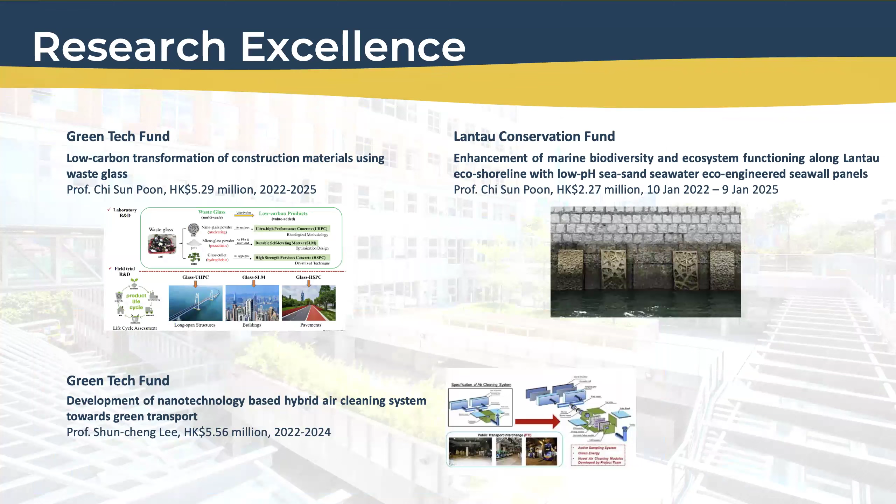and environmental engineering. Dr. Liu's research focuses on explorations of novel microorganisms and applying these newly discovered microbial reactions in tangible applications. These applications manifest notably in the treatment of wastewater and waste sludge, as well as the upgrading of biogas and syngas, thus ultimately contributing to the advancement of sustainable environmental practice.

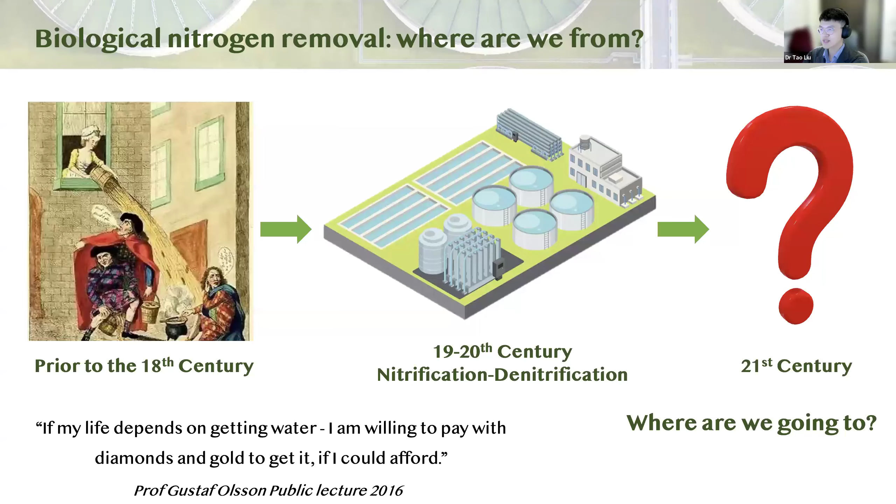If we look at the most significant changes happening in our daily life in recent years, you will find most of these changes are really based on some very significant fundamental findings. For example, the self-driving cars or the wireless charging technologies. These new technologies are really developed based on new fundamental findings in the relevant research field. So the same case for our wastewater treatment.

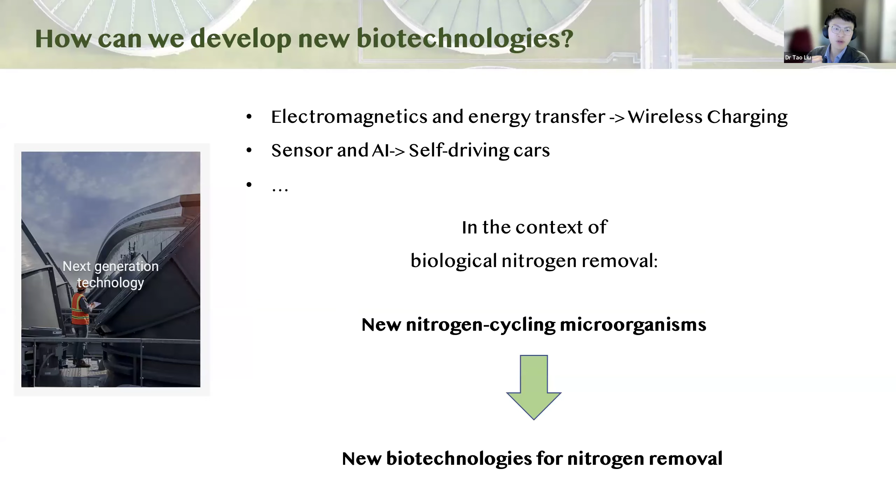For wastewater treatment, as I think most of you know, we rely on microbial processes, on biological processes, for removing the contaminants from wastewater. That's why the fundamental discovery of new microbial or biological processes is really becoming the foundation for the development of new biotechnologies for wastewater treatment. So this is really the logic between new technology development and the new fundamental knowledge we obtained from our research.

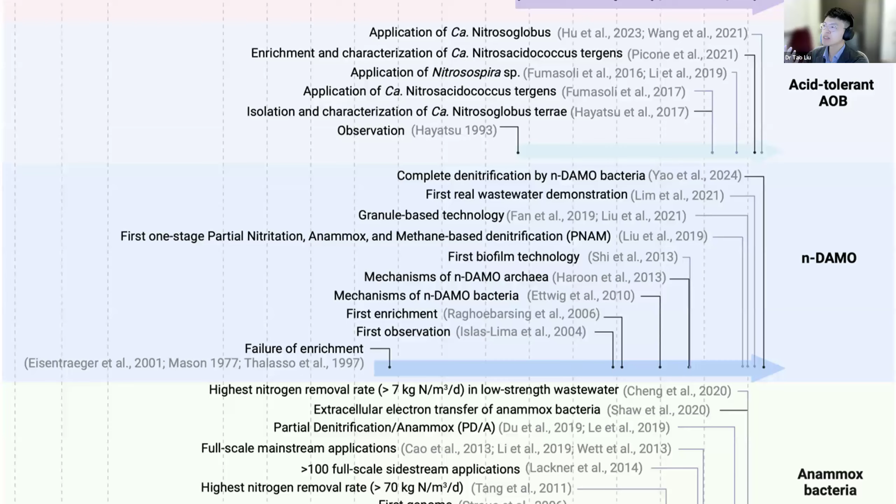In one of our recent publications, we summarized all the significant fundamental findings in the past 50 years and all the significant technologies we developed in wastewater treatment in the past 50 years. This is a very big figure, but you can see from part of this figure the fundamental discoveries, which are labeled as the black line, and so let me put my laser pointer.

As you can see from this figure, the fundamental findings and the technology development are labeled using different colors, but one very general conclusion from this figure is that the development of new technologies and the discovery of new fundamental knowledge are always connected with each other. Basically speaking, fundamental discovery supports the development of new technology, and in turn, the development of new technology also supports the discovery of more new fundamental findings. So that's really the beginning of my presentation.

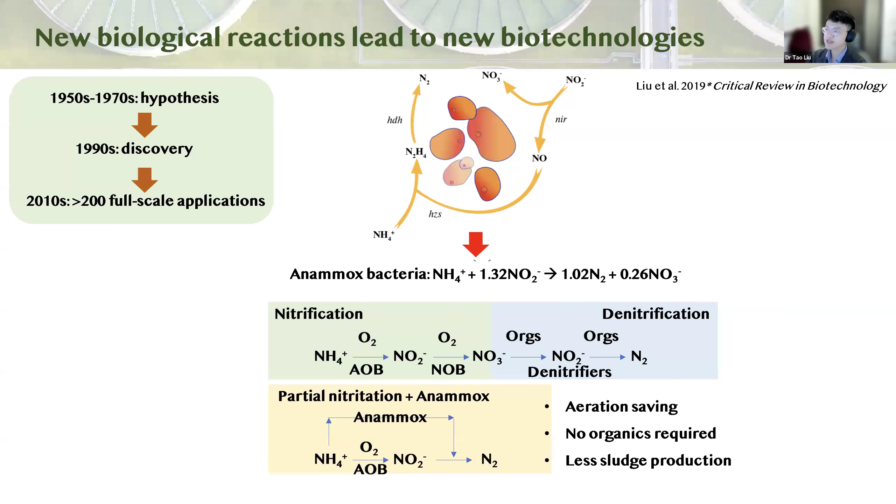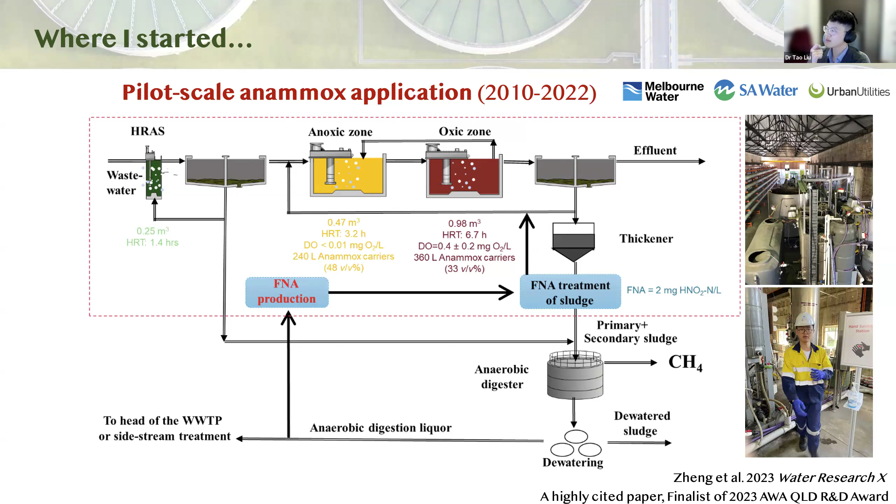Because of this experience working in the water industry, I have learned a lot about water and wastewater engineering, and I really had the opportunity to learn what the real requirements and real needs of the wastewater industry are. One of the facts I want to share with you is that the Anammox process nowadays has been applied in more than 200 wastewater treatment plants already, more than 200 full-scale applications.

But the fact is, all these full-scale anammox applications are utilized to remove nitrogen from side-stream wastewater. So what is side-stream wastewater? Side-stream wastewater means some very special wastewater, such as industrial wastewater, anaerobic digestion liquor, or landfill leachate. A unique feature of side-stream wastewater is that it usually has a very high concentration of nitrogen pollutants.

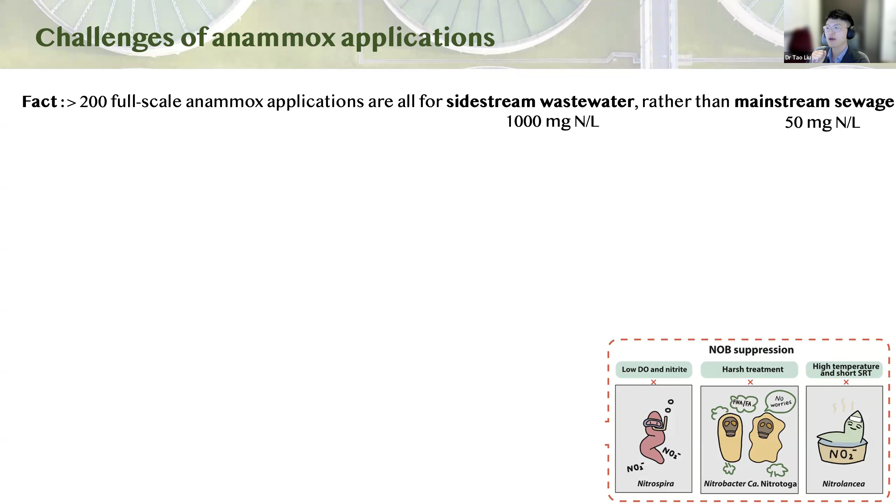However, for the most common domestic wastewater, the sewage, the current application of anammox is very, very limited. I have to say, at the current stage, across the world, there may be only a few successful full-scale anammox applications for treating domestic sewage. So why can't anammox technology be applied for domestic sewage treatment? There are mainly two major challenges.

The first challenge is NOB suppression. So what is NOB suppression? Again, come back to these figures. In order to utilize partial nitritation anammox, we need to suppress the second step of nitrification, which is the conversion of nitrite to nitrate. We need to stop this process using some strategies. We need to kill or inhibit this bacteria.

However, suppressing NOB, the bacteria contributing to this second step, is extremely challenging in mainstream sewage. Two of my students, Yan, my first PhD student, and Sue, the first PhD student I co-supervised, used laboratory study and mathematical modeling to prove why NOB suppression in the mainstream condition is extremely difficult compared to side-stream wastewater. I will not go into too much detail, but the conclusion is NOB suppression is very difficult in mainstream sewage. That's one of the challenges for applying anammox in mainstream sewage treatment.

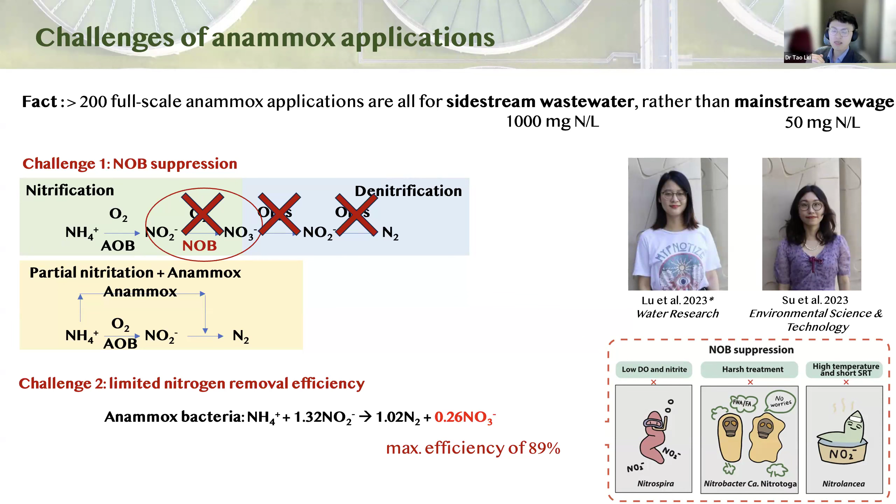That's why our research group wants to develop strategies to overcome these two challenges and make anammox applicable to domestic wastewater treatment. To overcome the first challenge, we got some inspiration from the side-stream application. Remember, anammox has already been applied widely for side-stream wastewater, with more than 200 full-scale applications. Why can anammox be applied there? One very important fact is that side-stream wastewater has a very high concentration of nitrogen.

Because of the high nitrogen concentration, even at pH 6.5, a relatively neutral pH, it will naturally form a chemical named free nitrous acid, shortened as FNA. FNA concentration can automatically reach the 1 to 3 ppm level in side-stream high-strength wastewater. There is an equation to calculate the FNA concentration, shown above; it is related to the pH and the nitrite concentration. Because of the high nitrite concentration, FNA can easily reach 1 to 3 ppm. And FNA is actually a toxic chemical.

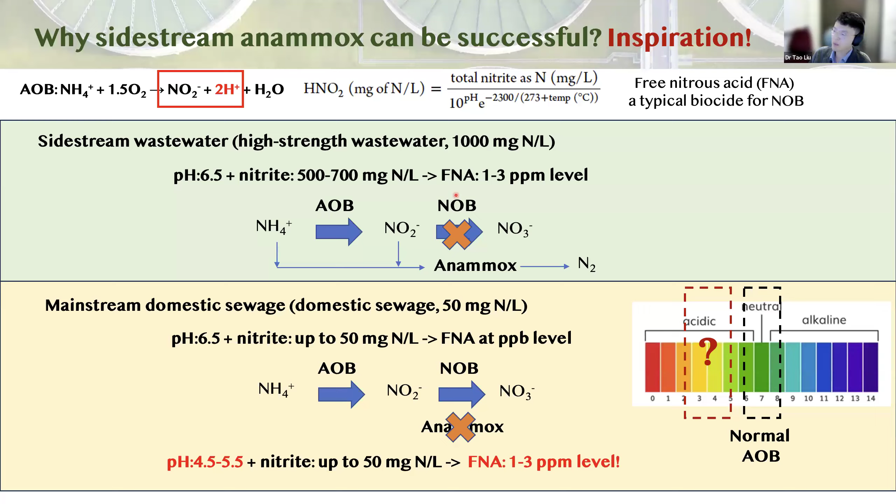So therefore, we wonder, can we find some new microbial process or biological process which can tolerate, which can survive at acidic pH? For example, pH 4.5 or pH 5.5. That's really the inspiration or the starting point for our research. So we want to find some acid-tolerant bacteria which can survive at acidic pH in order to achieve the goal I just mentioned.

So therefore, we looked into the literature and found that the acid-tolerant AOB, the acid-tolerant bacteria, exist in many natural ecosystems. Many different publications have already found acid-tolerant bacteria in acidic soil systems. And therefore, based on these discoveries from natural ecosystems, the research group led by my previous supervisor, Professor Zhiguo Yuan at UQ, tried to enrich such acid-tolerant bacteria in our laboratory bioreactors. The fact is we were successful. We successfully enriched the acid-tolerant bacteria in our laboratory reactor.

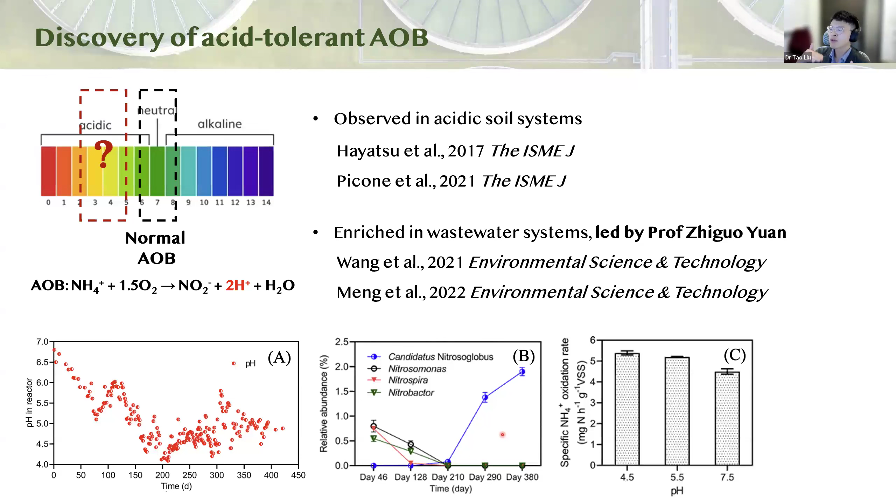As you can see here, the pH of the bioreactor gradually decreased from around 7, the neutral pH, to pH 4.5 or 5.5, this acidic pH level. And during this process, we found the traditional bacteria currently utilized in wastewater treatment plants disappeared. For example, Nitrosomonas, Nitrospira, and Nitrobacter disappeared after 200 days. And gradually, a new bacterium named Nitrosoglobus appeared in our bioreactors and became the dominant bacteria in the reactor. So at this acidic pH, the new bacteria were enriched in our laboratory reactors.

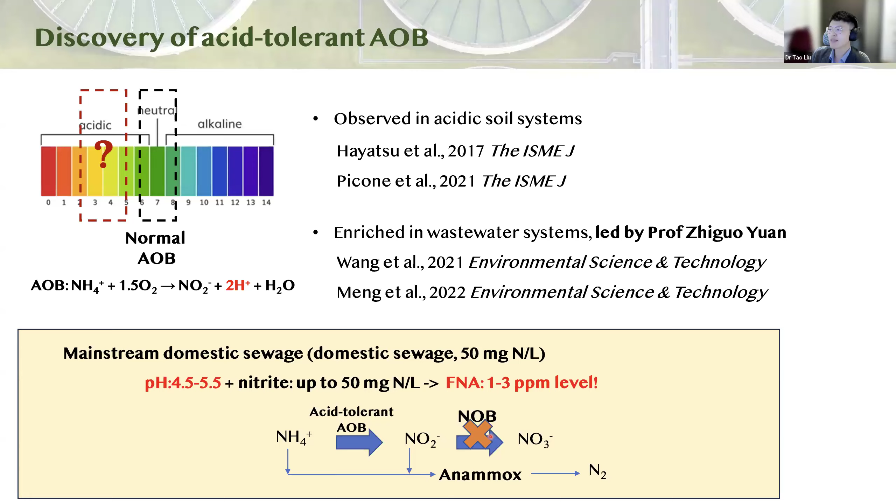So by utilizing this newly enriched acid-tolerant bacteria, our previous hypothesis became true. We can utilize this bacteria to operate the bioreactor at pH 4.5 to 5.5. If that's the case, even with mainstream domestic sewage, we can achieve ppm-level FNA, and because of this high FNA, we can suppress NOB, and then we can apply anammox technologies. So that's really the reasons and the hypothesis behind our research story.

And the second PhD student, Niu, his PhD focused on the development of technologies utilizing this acid-tolerant AOB in wastewater treatment. So in his research, we developed a membrane biofilm system to cultivate this acid-tolerant AOB in our laboratory.

But one very interesting phenomenon I want to highlight here is the nitrogen removal rate we achieved in this study is one order of magnitude higher than the rate currently utilized in wastewater treatment plants. For example, in current wastewater treatment plants, the nitrogen removal rate is usually about 0.2, 0.3 kilogram nitrogen per cubic meter per day. And in this research, the total nitrogen removal rate we achieved is around 2.3 kilogram nitrogen per cubic meter per day.

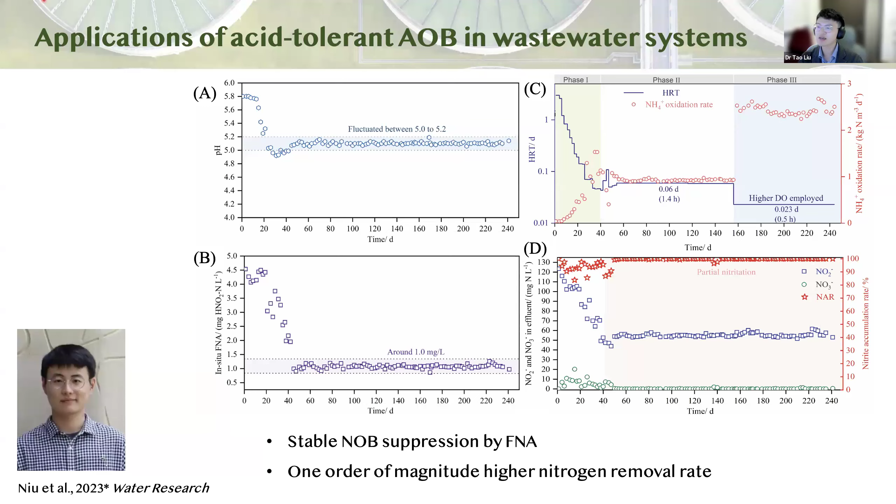So that's really one of the very significant findings from this research. Again, similar to the phenomenon I just showed you, the traditional bacteria disappeared along this process, while the new acid-tolerant bacteria, Nitrosoglobus, gradually enriched in our bioreactor, which has been confirmed using different methodologies.

So that's our application of this new bacteria in wastewater treatment. Actually, in addition to wastewater treatment, we also apply these bacteria for sludge treatment, because for the wastewater, we generate a lot of sludge, the primary sludge and the secondary sludge.

So one of the very traditional approaches to manage the sludge is to add some acid to regulate the sludge pH. For example, if we add some acid to acidify the sludge to pH 4 to pH 5, we can achieve the sludge reduction and stabilization purpose. And if we further decrease the sludge to pH 2, we can remove some heavy metals from the sludge. And in order to landfill this sludge, eventually we also need to add some base to raise up the pH again. So this is really a traditional way to manage the sludge in current treatment plants.

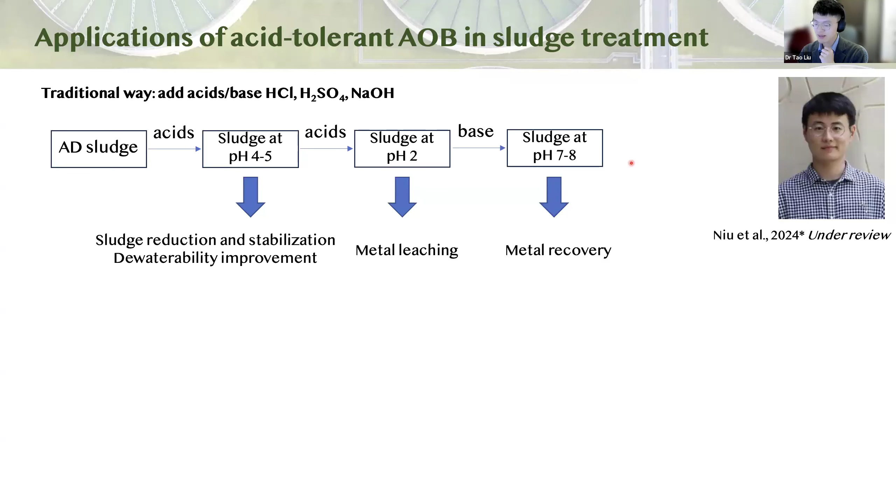So if we can utilize the protons generated in the nitrification and the alkalinity generated from the denitrification, we can easily regulate the sludge pH from neutral pH to acidic pH and then back to neutral pH again. So this is the principle or the hypothesis for our technologies. That's why we proposed some technology to achieve this goal.

For the sludge, we mix the sludge, for example, the primary sludge or the secondary sludge or even the AD sludge, together with the acid-tolerant bacteria we enriched in the lab. We mix these two cultures together and we put in some aeration. Because of the protons generated in this first equation, the sludge pH will gradually drop to 4 to 5. If we only target sludge reduction and sludge stabilization, pH 4 to 5 is already enough.

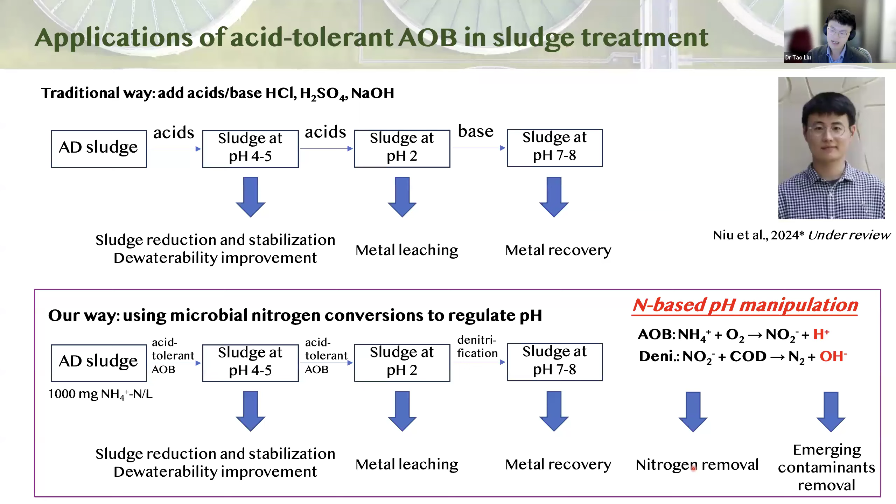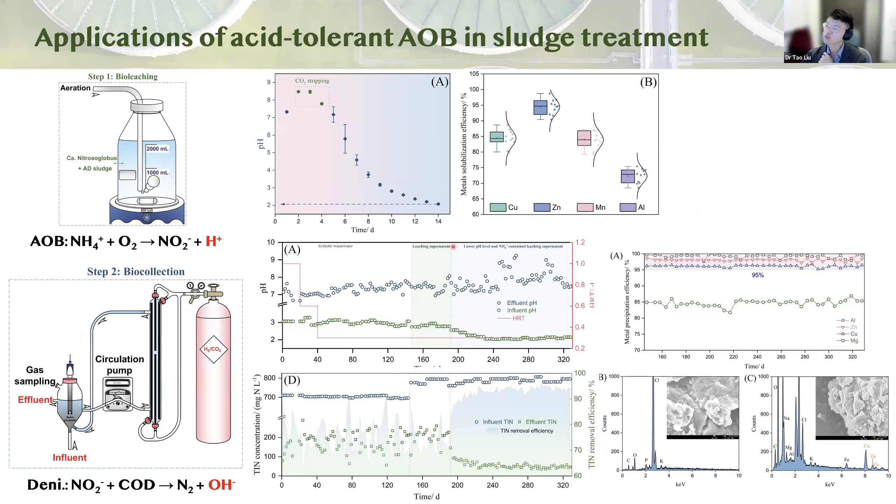Okay, one more thing I want to highlight here is because we can drive the pH back to neutral, we can also recover the heavy metals from the sludge. You can imagine the heavy metals will be first removed from the sludge because of the low pH. They will be leached from the sludge into the supernatant, and then once the pH is raised to 7, these heavy metals will precipitate. So we can recover these heavy metals again from the supernatant. So that's what we achieved in our laboratory.

Now let's do a very quick summary of the first stage, our applications. By utilizing these acid-tolerant bacteria, we can achieve both more sustainable wastewater treatment and more sustainable sludge management. We can utilize the acid-tolerant AOB and anammox for wastewater treatment, and we can also utilize the acid-tolerant bacteria for sludge treatment, which I have already covered.

And one very important fact is that in order to utilize the acid-tolerant bacteria in the wastewater, it will require the wastewater to have very low alkalinity. But the fact is, for most domestic sewage, the alkalinity is quite sufficient. It means we can't utilize acid-tolerant AOB directly to drive the pH of the wastewater down to, for example, pH 4 or pH 2.

We can't achieve that, so we have to add some acid to achieve this goal. The interesting thing is, in Hong Kong's case, about 80% of the wastewater is currently treated by chemically enhanced primary treatment, which means we usually add some ferric chloride to enhance the primary treatment. In addition to enhancing the primary treatment, another factor is that ferric chloride is an acidic chemical. If we add ferric chloride into the sewage, it will automatically decrease the sewage alkalinity.

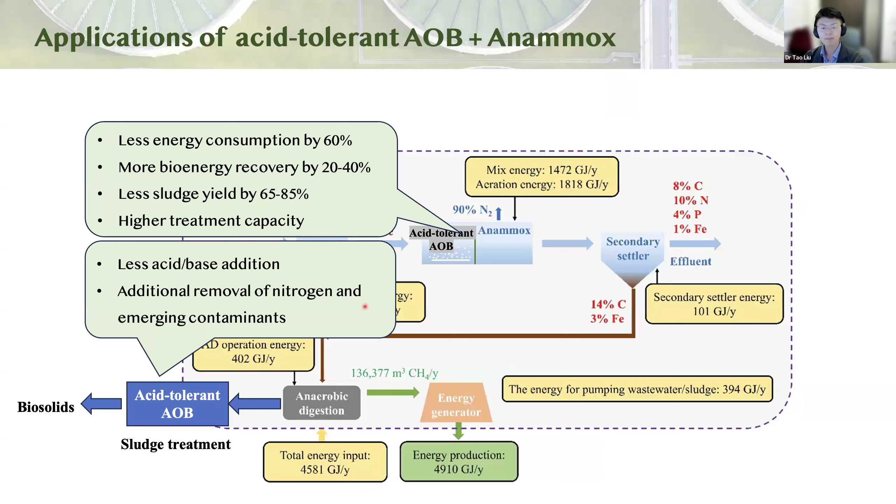So this acid-tolerant process is particularly suitable for Hong Kong wastewater treatment compared to other regions. For other regions, we need to add some acid, but for Hong Kong, we already add ferric chloride to decrease the sewage alkalinity, which means we don't need to add additional acid to achieve the low pH. So this is the summary of the benefits we can achieve by utilizing this acid-tolerant process and anammox.

Remember we have the second challenge. The second challenge is a relatively limited total nitrogen removal efficiency because of the nitrate accumulated in the anammox effluent. So we want to address this question as well. One very traditional approach to address nitrate accumulated in the final effluent is to add some organic chemicals into the final effluent to polish the anammox effluent. This is the traditional way. But again, adding chemicals into the wastewater will lead to additional cost.

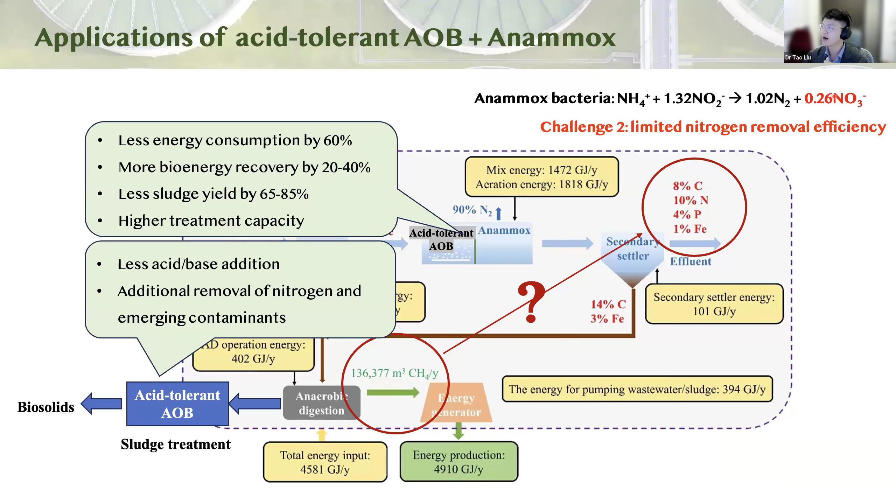That's why we look into this wastewater treatment plant. We wonder, can we utilize the methane generated from the anaerobic sludge digestion in the biogas to drive the denitrification process? Because methane is also one of the forms of organics. Can we utilize methane as organics to polish this anammox effluent? So that's the second part of our research. We wonder, can we achieve that?

This is also based on a new discovery. We discovered some new microorganisms which can achieve this goal. They can utilize methane as organic carbon to remove nitrite or to remove nitrate. This is a very unique function and very unique bacteria.

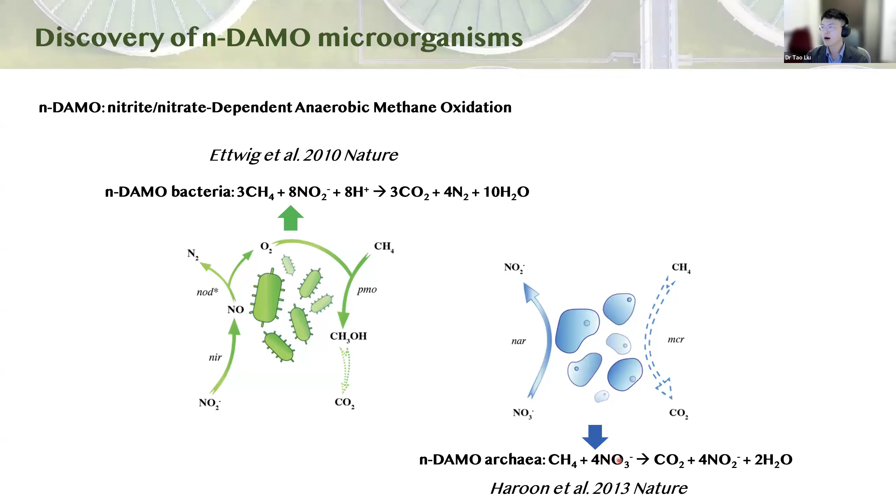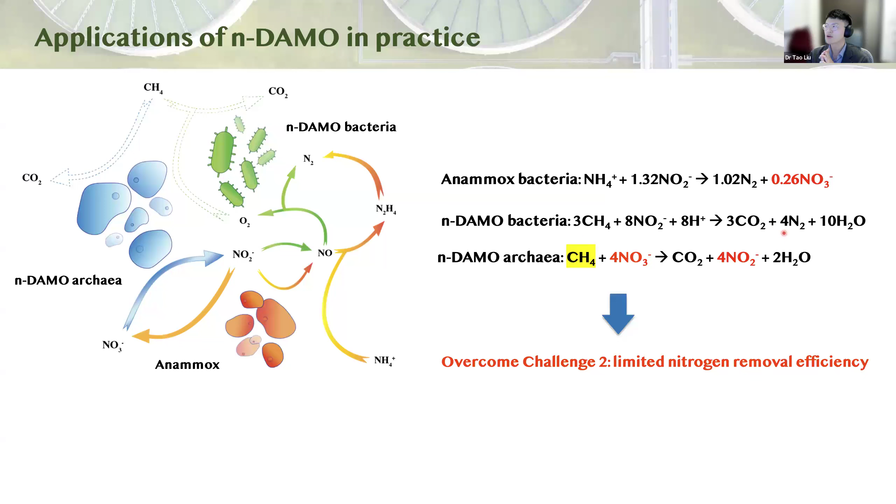By utilizing these new bacteria, we propose some new technologies, trying to combine these new bacteria together with the anammox bacteria. By combining all these bacteria together, you can imagine the nitrate generated from the anammox process can be reduced by the n-DAMO archaea and n-DAMO bacteria, eventually to nitrogen gas. So by combining all three bacteria or archaea together, we can eventually achieve almost complete or 100% nitrogen removal from the wastewater. So that's really the hypothesis we have.

Based on this hypothesis, we can utilize the biogas generated from the anaerobic sludge digestion to drive the denitrification in the wastewater. However, one very critical issue for this new technology is that methane, or biogas, is quite insoluble in the wastewater. It has very low solubility, and it is also a flammable gas, so it has some risk if we want to use it in wastewater treatment. That's why we want to figure out a new bioreactor design to enhance the biogas or methane solubility.

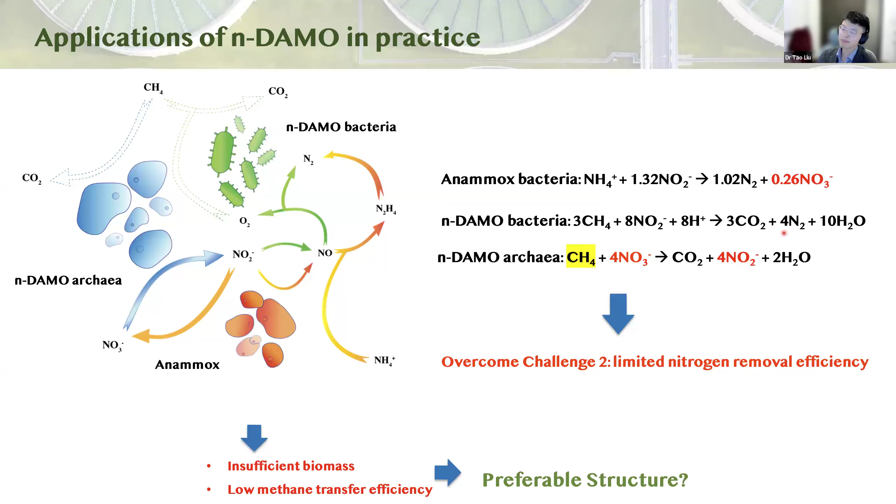Then we proposed this new bioreactor design named the membrane biofilm reactor. The unique feature of this new bioreactor is that, just like our hair, we have a lot of hollow fibers installed in the reactor. In the lumen of the hollow fiber, we deliver the methane, or the biogas, and the methane molecules can diffuse from the inner gas phase into the outer bulk liquid, which is the wastewater, and dissolve into the wastewater very efficiently.

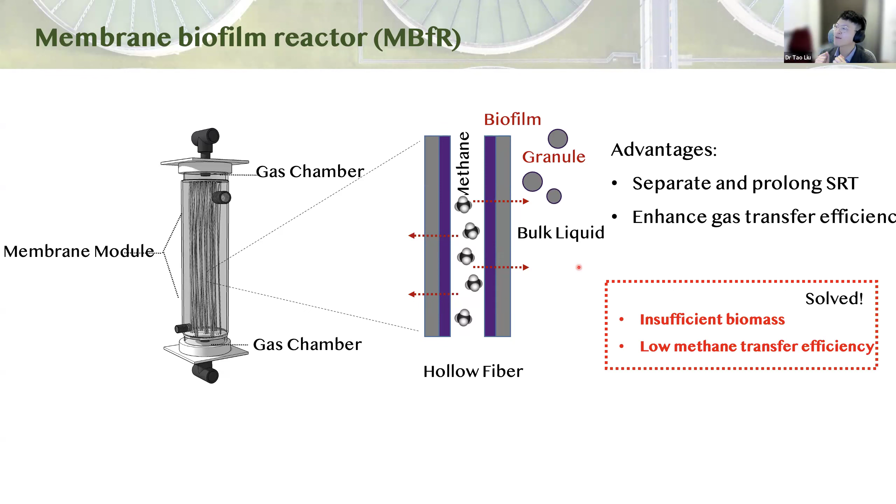So when you operate the reactor, you cannot see any bubble, very different to the traditional bubbling aeration utilized in the wastewater treatment plant. You cannot see any bubble on the surface of the hollow fiber. It is a pure diffusion process, which can significantly enhance the biogas or methane transfer rate. So by utilizing this new design, we developed some technologies to remove nitrogen from the wastewater.

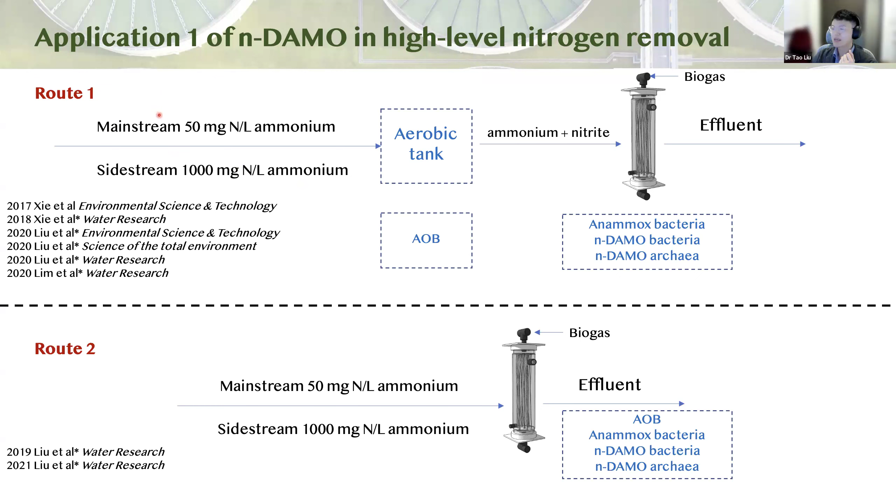As I just mentioned, we utilize this design to remove nitrogen from different types of wastewater, for example, side stream wastewater with very high concentrations of nitrogen, or mainstream domestic sewage with very low nitrogen pollutants. So we apply this technology in many different scenarios in our laboratory. Here is one of the examples. As you can see here, the left one is to treat the high strength wastewater. The concentration of the nitrogen pollutant is around 1,000.

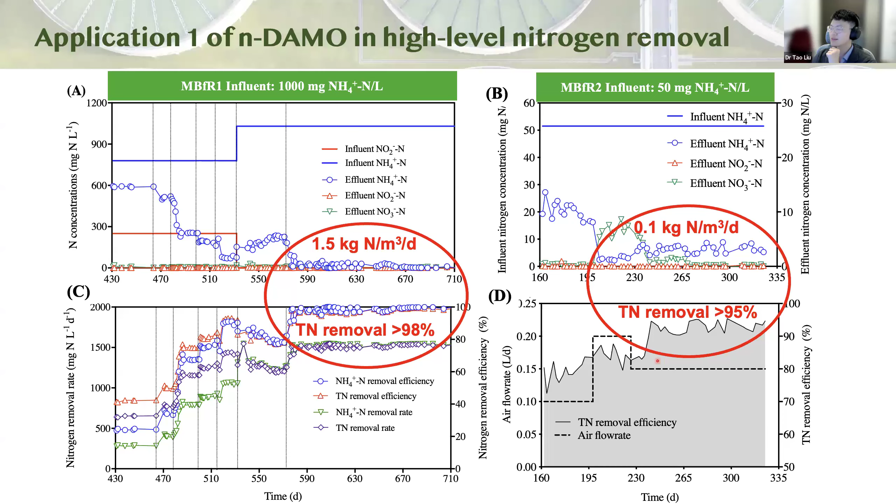The second one is the low strength wastewater, around 50 milligram per liter nitrogen pollutants. For both cases, eventually, after 1 year operation, we demonstrate this technology is very efficient in removing the nitrogen from wastewater. The rate achieved and the removal efficiency achieved is satisfactory, can meet a very stringent discharge standard already. So which is a very promising configuration.

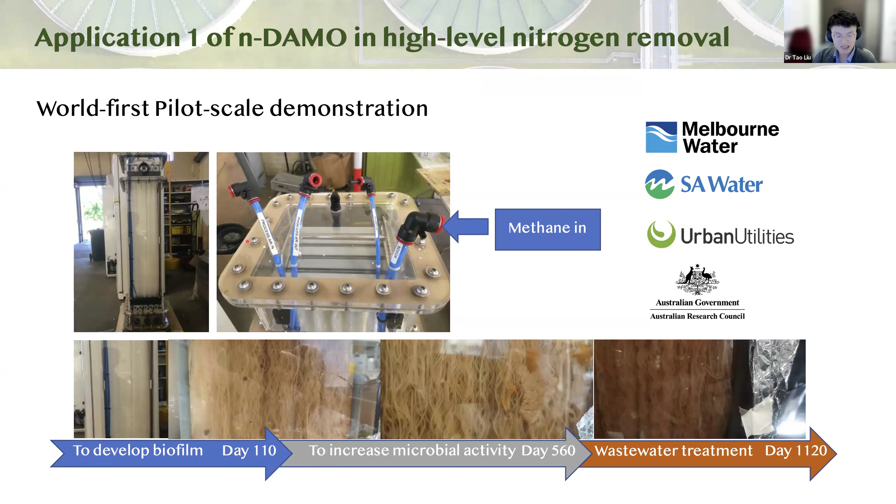Actually, in our research group, in addition to laboratory demonstration, what we really want to do is trying to promote such technology, to facilitate the adoption of such technology by the water industry. That's why we try to promote this technology, scale up this technology at pilot scale. So we demonstrate this world first pilot scale in Australia, still in the pilot plant in Queensland, based on the collaboration from three water utilities in Australia and the Australian government. We demonstrated this technology successfully at a pilot scale, which showed very promising results.

So the second application scenario for this new bacteria is, as you can see, they can remove methane as well. Methane is a greenhouse gas. So that's why we wonder, can we utilize this new bacteria, this n-DAMO bacteria, to mitigate the greenhouse gas? Because we all know the greenhouse gas emission is a very serious concern for the current wastewater treatment. So in terms of methane, there are two sources in the urban wastewater treatment plant. One is from the sewer networks. Another one is from some anaerobic sewage treatment process. There are usually a lot of methane emissions from these two units. Therefore, we developed some technologies to remove the methane emissions from these different units.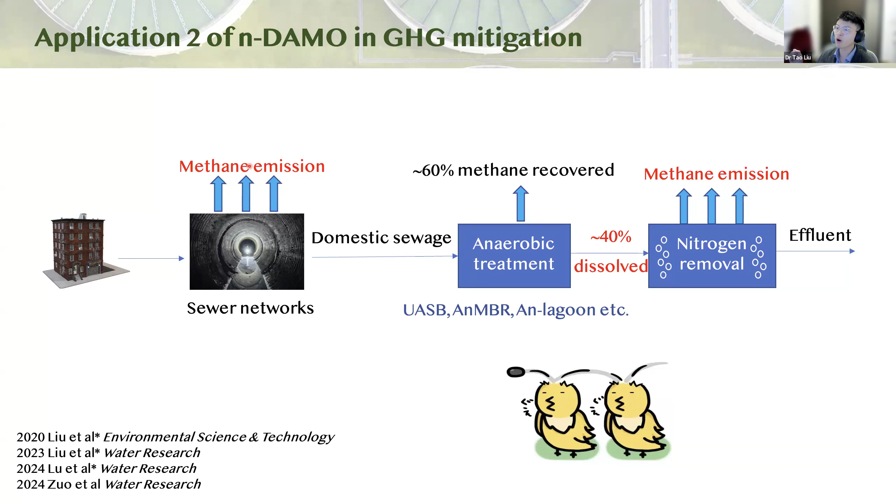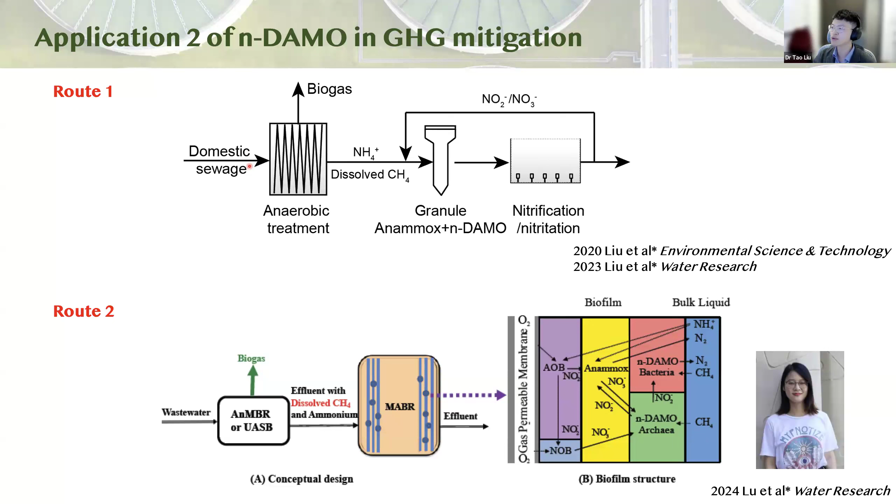Because as you can see, we remove nitrogen, we remove methane together. So that's why we say this new technology is really a one stone for two birds technology. We can achieve two goals using one particular technology. For these technologies, we also have different technical routes, one-stage route or two-stage route, which I will not go into too much detail today. I will give you a quick update for our recent results.

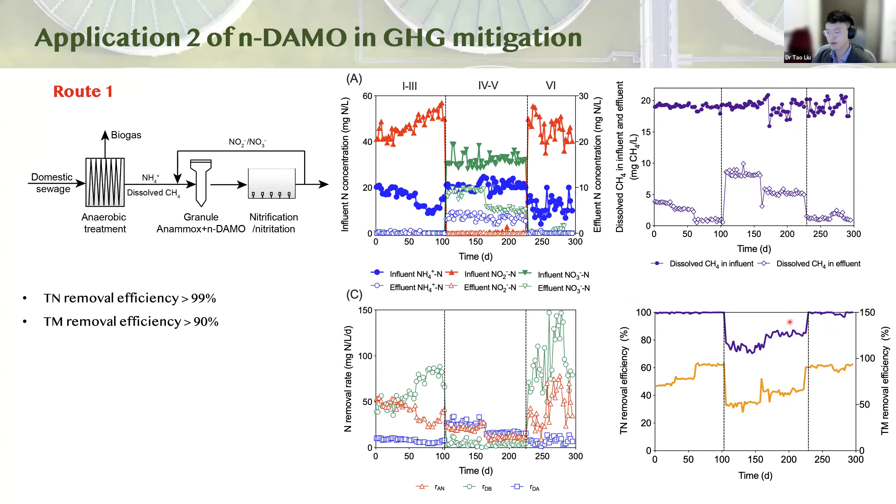As you can see for these figures, the last figure, the nitrogen removal efficiency we achieved is almost close to 100%, while the methane emission removal efficiency is very close to 100%. So it can achieve these two goals simultaneously. Similarly, in another one-stage configuration, this is the nitrogen removal efficiency, also around 100%, and the methane removal efficiency is also around 90 or 80%. So we can easily mitigate the methane emissions and also remove the nitrogen from the wastewater. So that's the technologies we're trying to demonstrate in our laboratory.

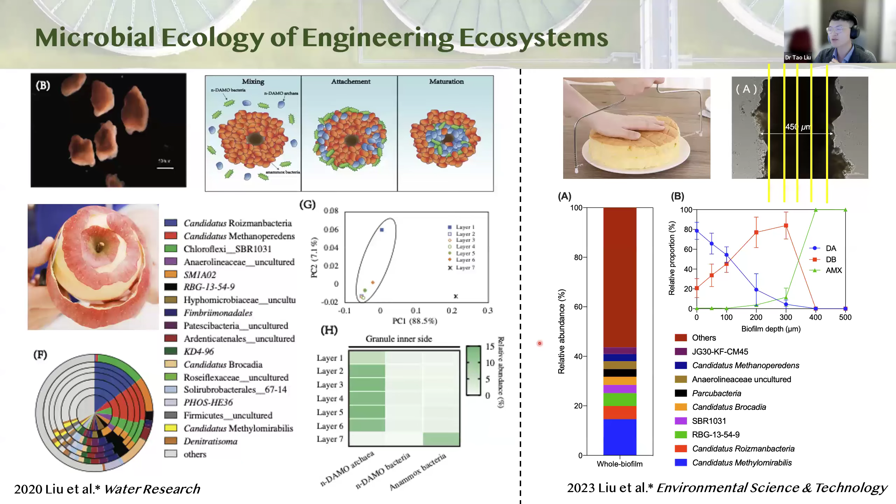In addition to the technology demonstration, we are also very interested in the fundamental knowledge inside the technologies. So we developed some very sophisticated technologies to reveal the microbial process in the technologies we developed. For example, we developed some technology just like cutting a cake or peeling an apple. We can see the granules or the biofilms in depth using our technologies. So that's really some very interesting fundamental study we're trying to investigate in our laboratory.

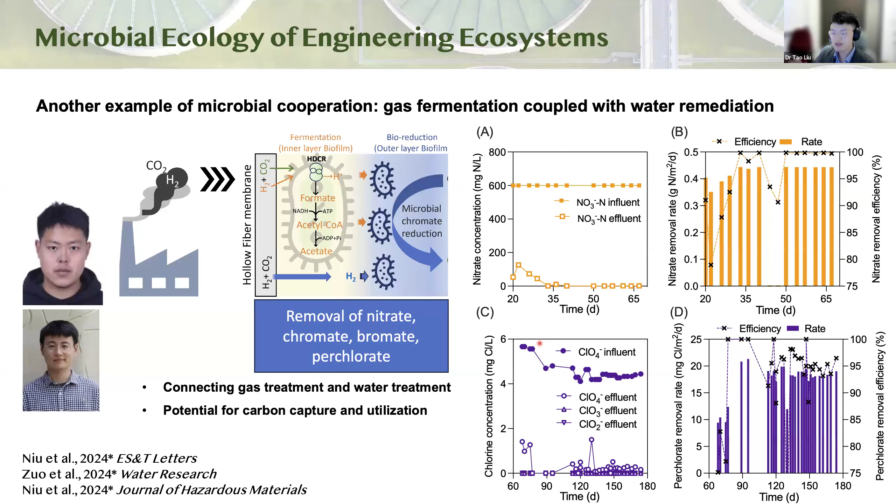Another very interesting thing I want to share with you is we are also trying to connect the wastewater treatment with the waste gas treatment. So as we know, for example, for T Park in Hong Kong, for the sludge incineration, there will be a flue gas generated, right? The flue gas in some cases contains CO, CO2, and in some cases also contains hydrogen gas. We are trying to develop some strategy utilizing these flue gases as a source to remove many different contaminants from water and from the groundwater. We're trying to connect the gas treatment together with the wastewater treatment. Okay, so that's a very quick summary of our research.

So in summary, the biological fundamental knowledge leads to the development of new technologies. And in turn, the new technologies are also a platform for us to learn some new fundamental knowledge. And all these new technologies are really leading the next generation of wastewater treatment. The last two slides, I want to share with you what we are doing here at PolyU. In PolyU, we are developing a research group focusing on the next generation urban wastewater management. In general, we summarize all the research directions regarding the future wastewater treatment plant into 5 categories.

The first target is about the greenhouse gas emissions. Everyone is talking about carbon neutrality. So that's why we want to develop some technologies to mitigate. So firstly, we want to develop something to monitor the greenhouse gas emission. And then we also want to mitigate the greenhouse gas emission across the entire urban wastewater systems. The second goal we want to achieve is to intensify the treatment capacity. Without a significant expansion in space, we want to develop some efficient strategy to intensify the treatment capacity of current treatment plants.

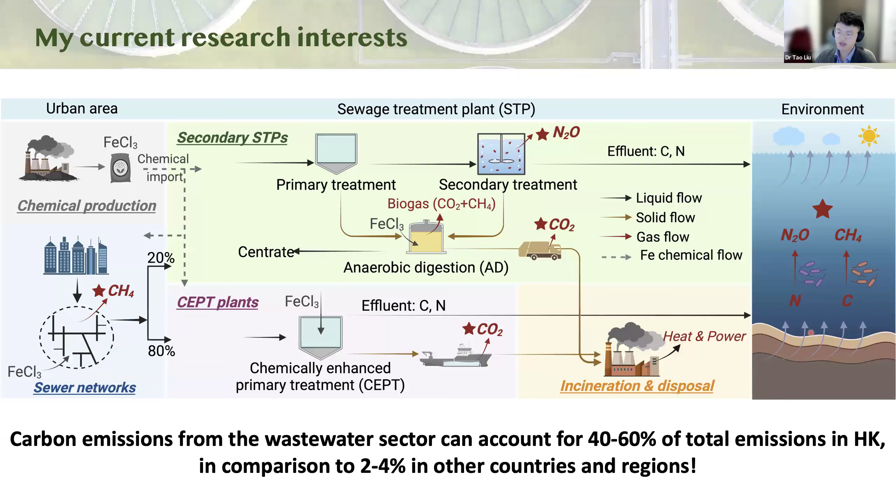So this number is based on our very recent data mining from the IPCC report. So in the future, we want to get a more accurate number by measuring the real greenhouse gas emissions in the real wastewater treatment plant in Hong Kong.

So in order to achieve this goal, we proposed 3 different working packages to target the 2-stage carbon reduction goal and the carbon neutrality goal, which is proposed by the Hong Kong government. By 2030, we want to reduce the carbon emissions by half, and by the middle of this century, we want to eventually achieve carbon neutrality.

So that's why we propose the different strategies for the water sectors. How can we achieve the 2030 carbon reduction goal, and how can we achieve the 2050 carbon neutrality goal, which I will not release too much details today. I hope in the future I have more opportunities to share more interesting research outcomes with everyone.